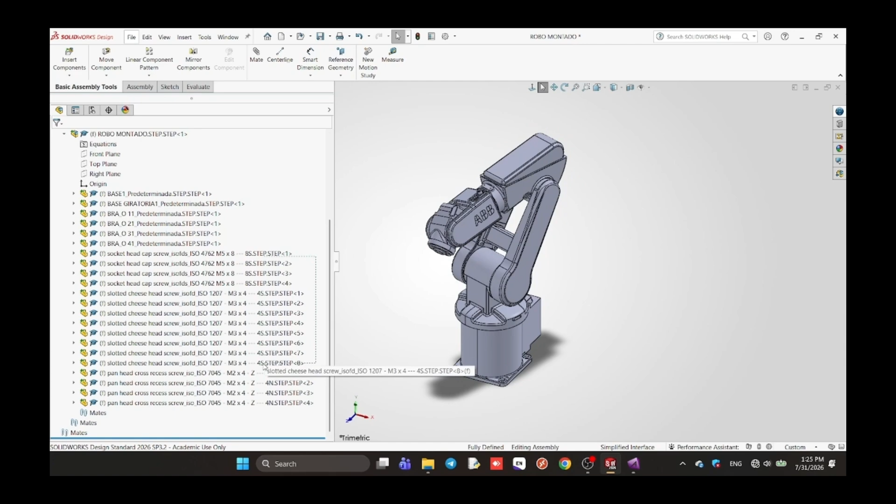When you want to export in Parasolid format, you can easily hide the redundant parts you don't want to transfer, and then export it. These are my 6 main parts. I want to keep them. I select the parts I don't want to transfer and hide them. Then I go for saving the model.

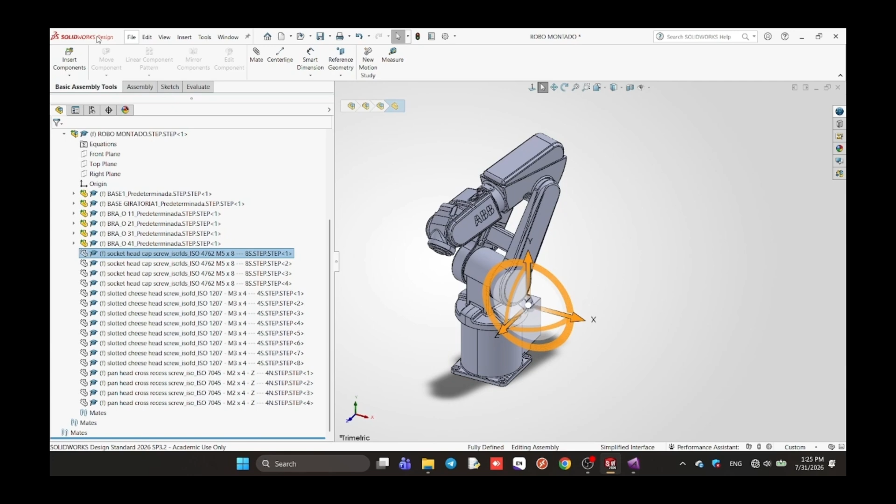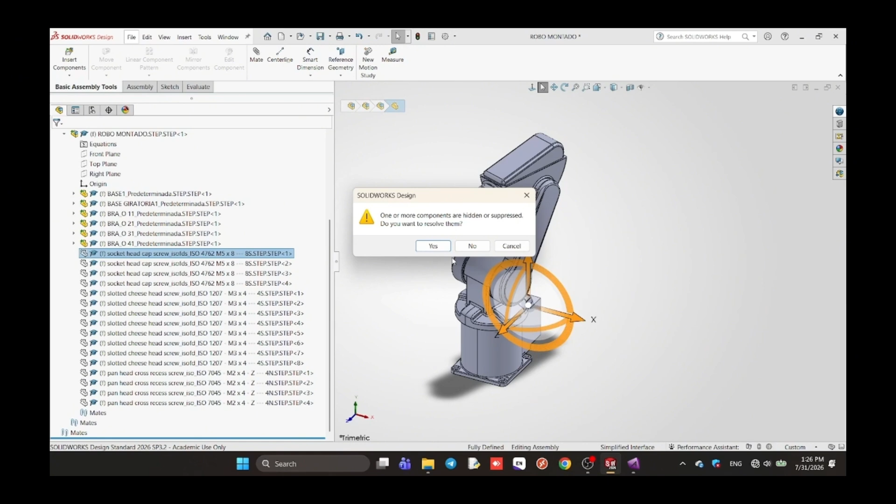You can export in a STEP file too, but Parasolid is more accurate in terms of keeping the geometry of your model. Parasolid is a better format and you find fewer problems inside Adams. Here it asks, do you want to keep hidden or suppressed parts? And we should select no, because we want to keep the model as simple as possible.

Then we go inside Adams and import the model. You shouldn't go for new database when you want to import from SolidWorks. Import should be chosen. And we go to the address of the model. Then we should choose a name. Here I choose ABB. And I don't change the default settings of Adams.

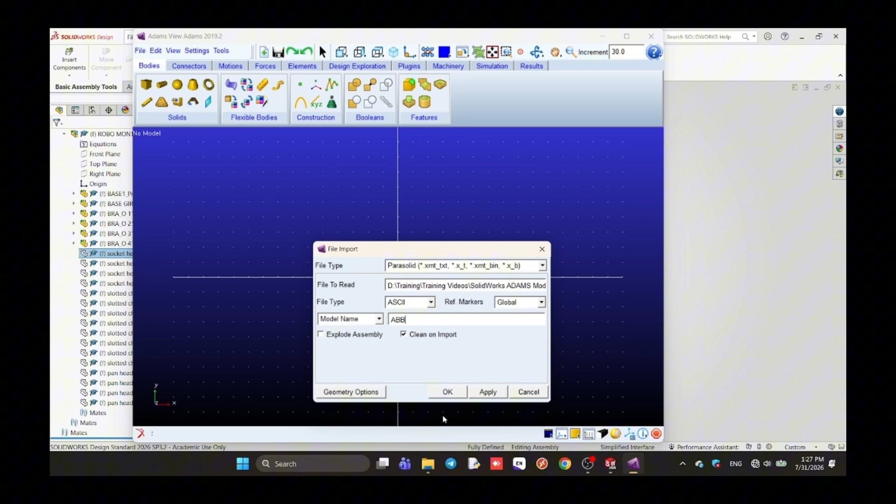If you enable explode assembly, it explodes your robot model and puts the parts in different positions. So creating joints becomes more difficult. So I don't change this. I'm just going for OK. Then we go to view model. Okay, this is a wireframe format of the model without mass, without inertia. We should give mass to the links.

But first I go for defining gravity. By default, Adams regards gravity along the y-axis. I don't change it, but you can change it. If you want to regard gravity along the z-axis, you can change it from this window. We should select OK if we don't want to change it.

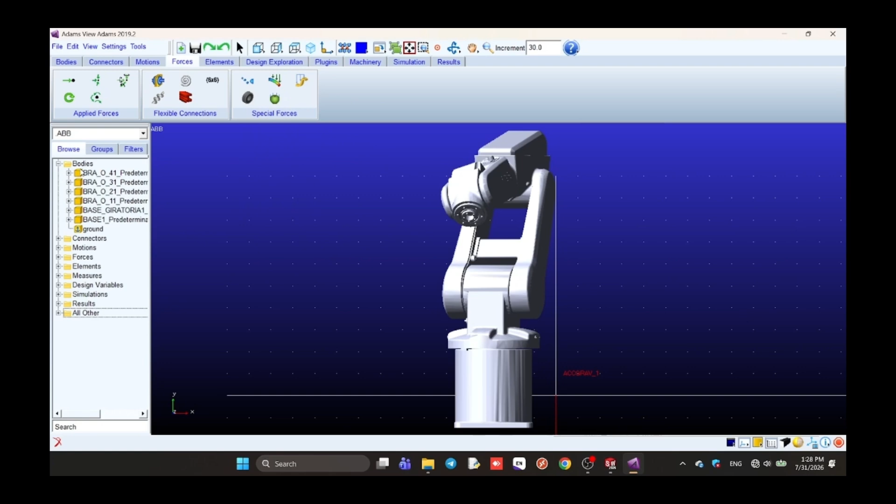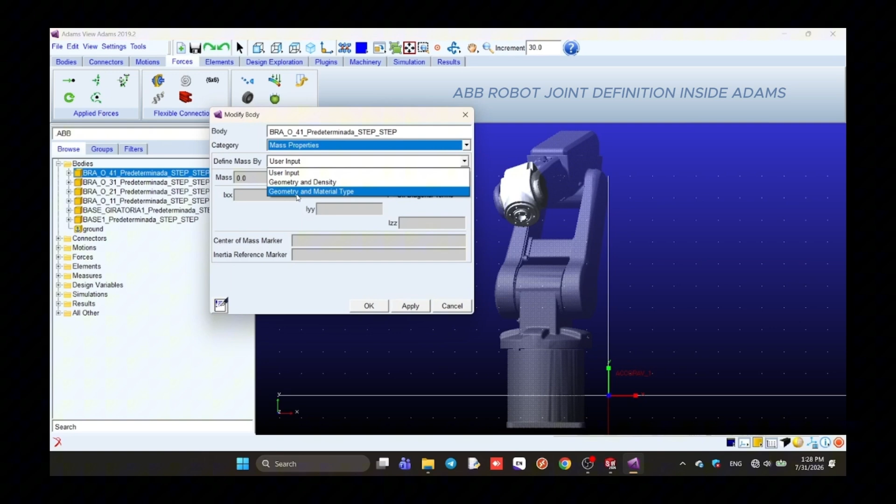Okay, here are the parts with the exact names according to the names of links in SolidWorks. We can change them in SolidWorks or we can rename them inside Adams, because these are very long names and somewhat similar. So we should give mass, modify. You have 3 different methods to define mass, manually or using the library of Adams. I go for choosing material inside the library of Adams and define aluminium for all the parts apart from the base. We do it for all the links.

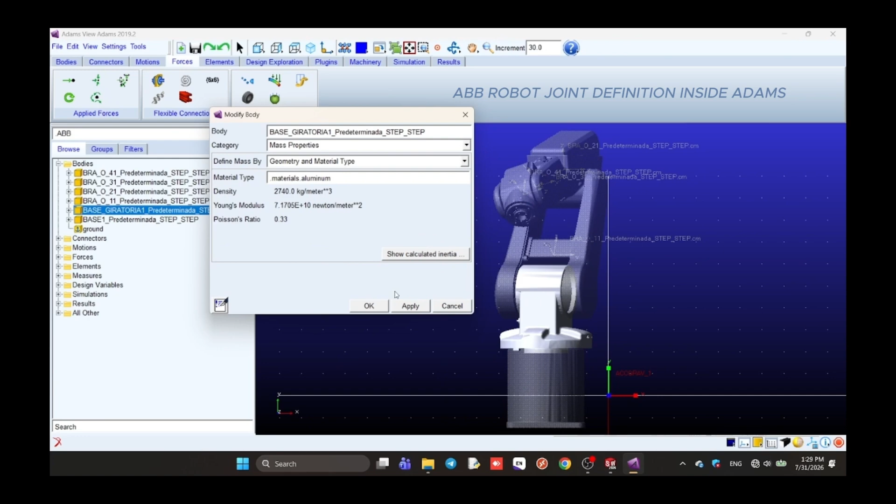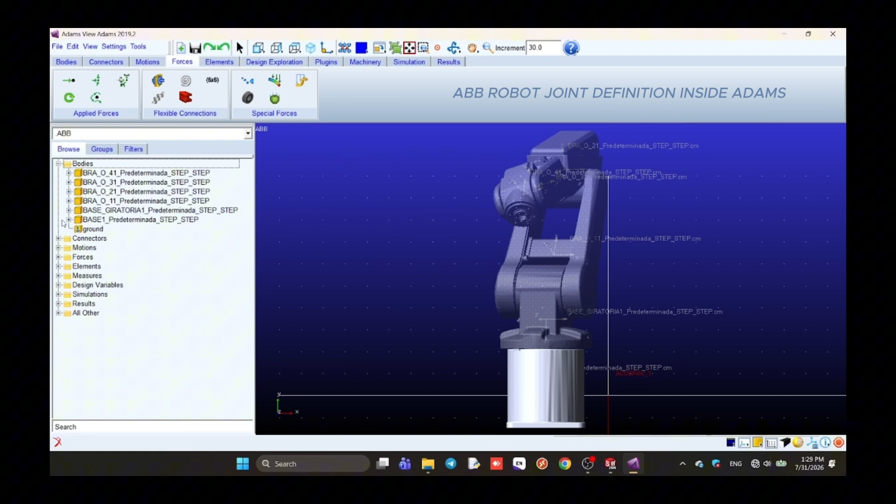But the base part is usually made of steel, so I select steel for it, not aluminum. Okay, and it's better to choose a different color for each link. When creating joints, we shouldn't be confused by the names of links or their colors. But you should change it from your solid part, not from the body part. Going to appearance using the library of Adams. Just choose different colors. It's not important which color. We do it for all the links.

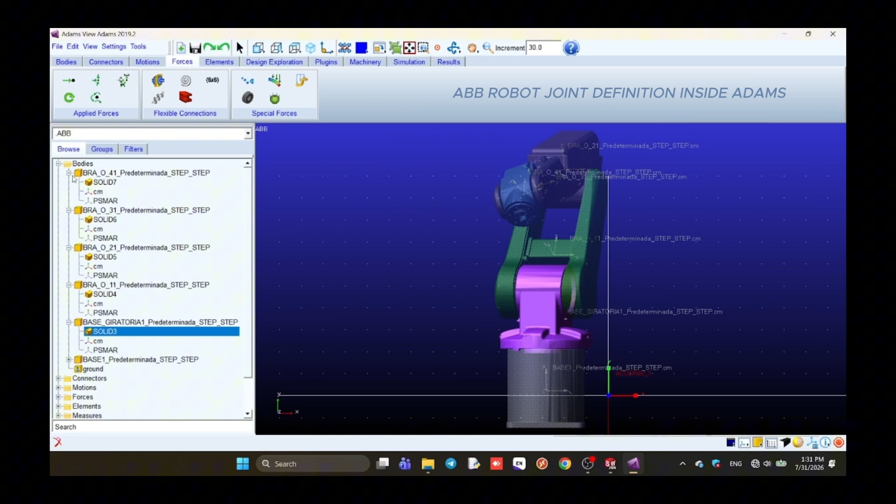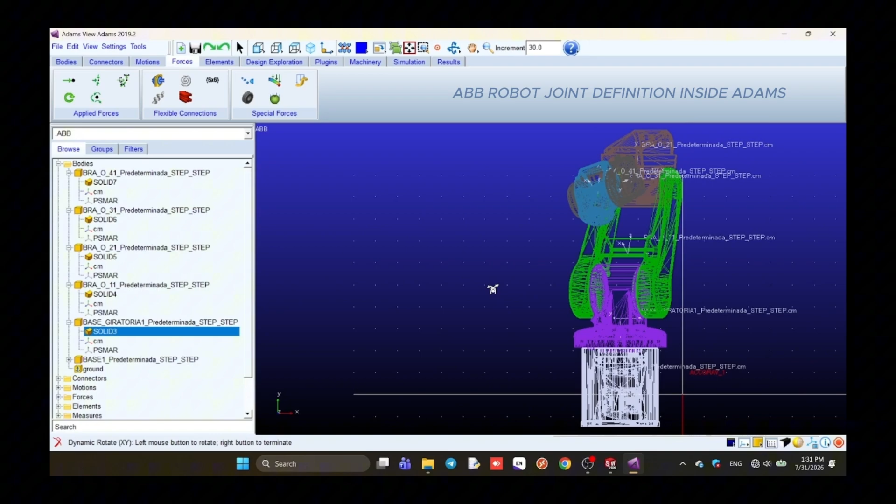Okay. Then we should define markers, because we need markers for creating joints. If you look at this model, it has an orientation compared to our working grid. So we cannot use the main axes of the coordinate system when defining joints. We should have joints according to the orientation of the link.

I want to use a center of mass marker. This marker is created after giving mass to the links. I just copy paste it, using its orientation, but transfer it to a better position. Orientation is very important when defining joints. Just copy the center of mass marker and Adams pastes it automatically.

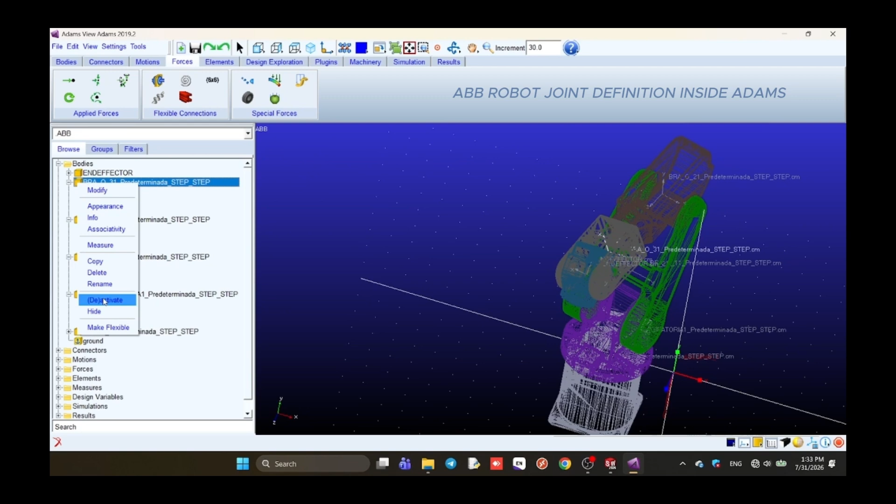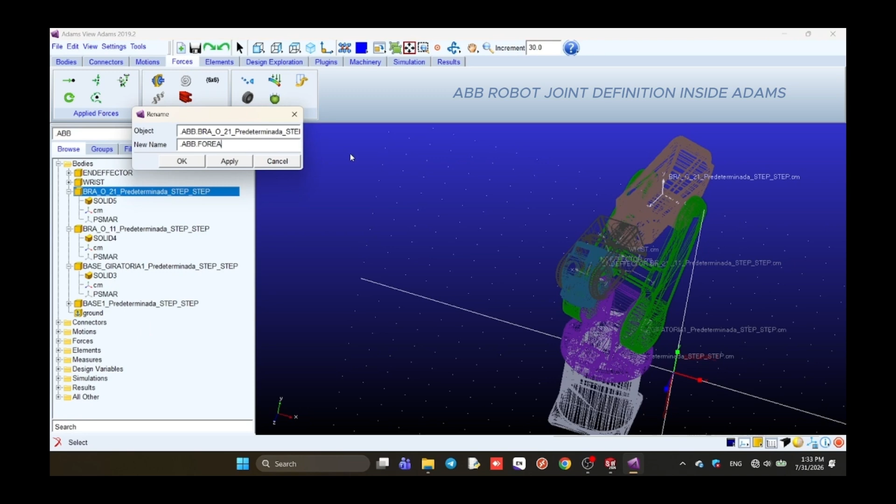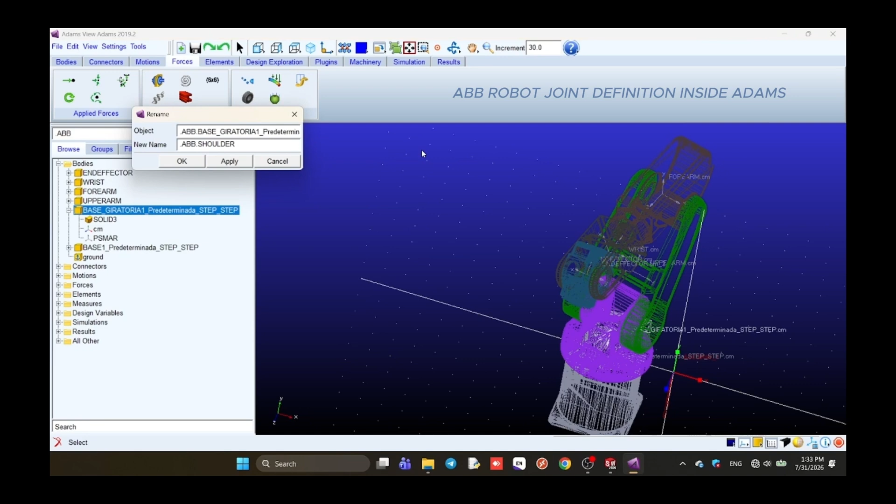Here it's better to first change the names of the links, because they're too long and very similar. We choose simpler names. The last part, which is named base, should be fixed to the ground. Okay, now I rename it to ref.

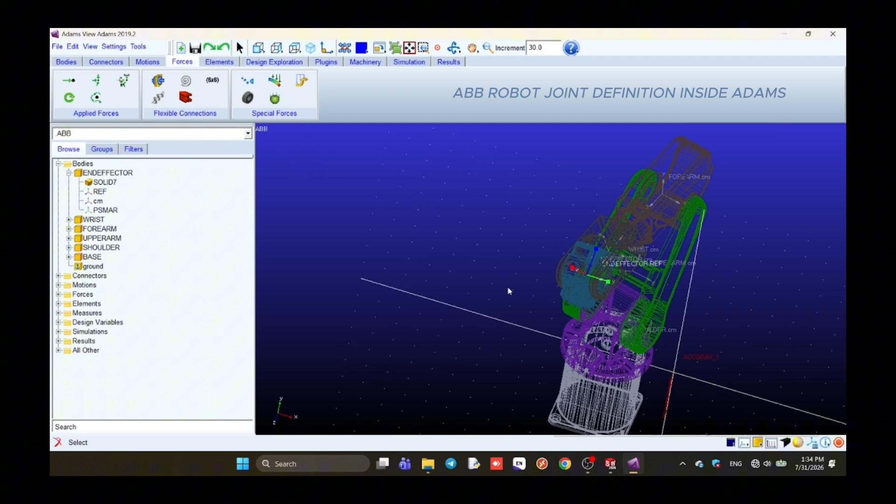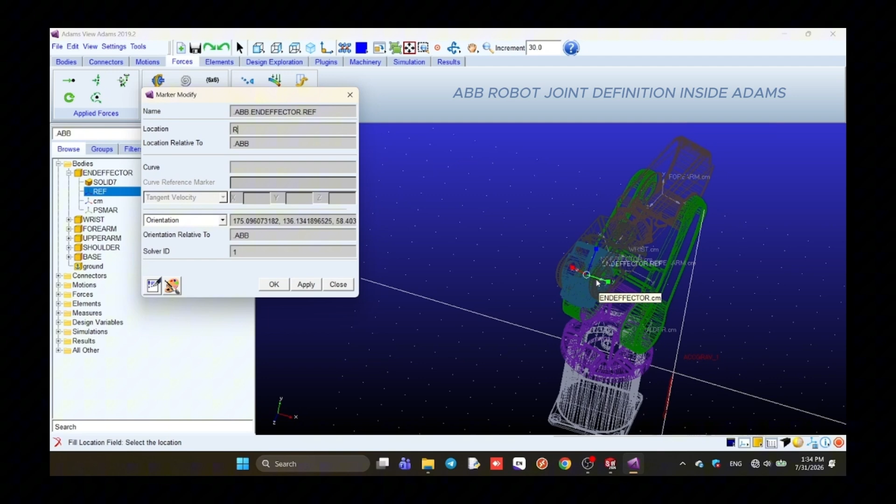And modify, transfer it to a better position. I don't change the orientation. I want to keep the orientation of the center of mass coordinate system. And so I just pick a point close to the interaction surface. I want to create a joint between the end effector and the wrist, the previous link. The wrist is fork shaped, but it's only one link. It doesn't need two revolute joints. Just one revolute joint is enough.

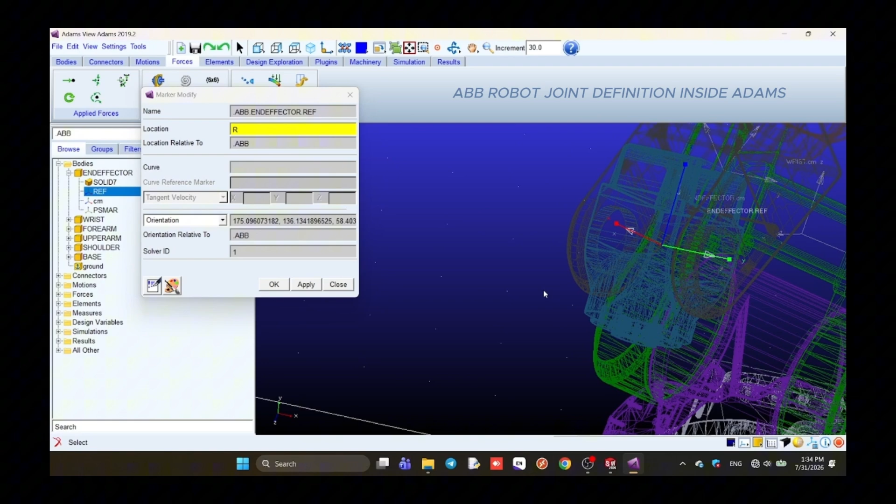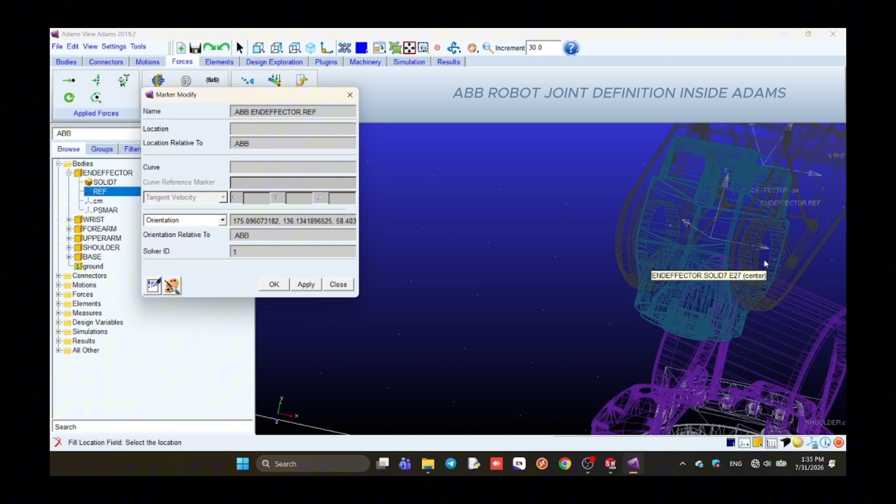I try to choose a point on one of the interaction surfaces. Which point you want to regard is up to you. The left one or the middle one, it's up to you. I hid one link before to better see the interaction surface. Okay, we can rotate it to see where the marker is created.

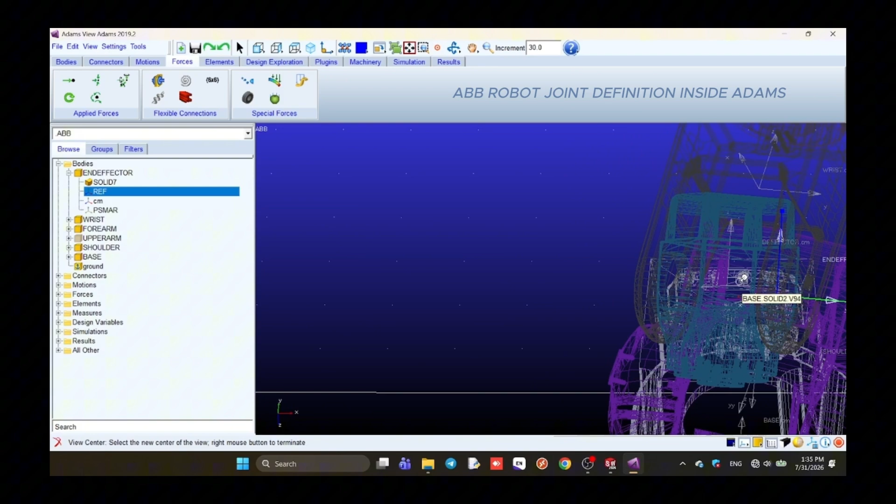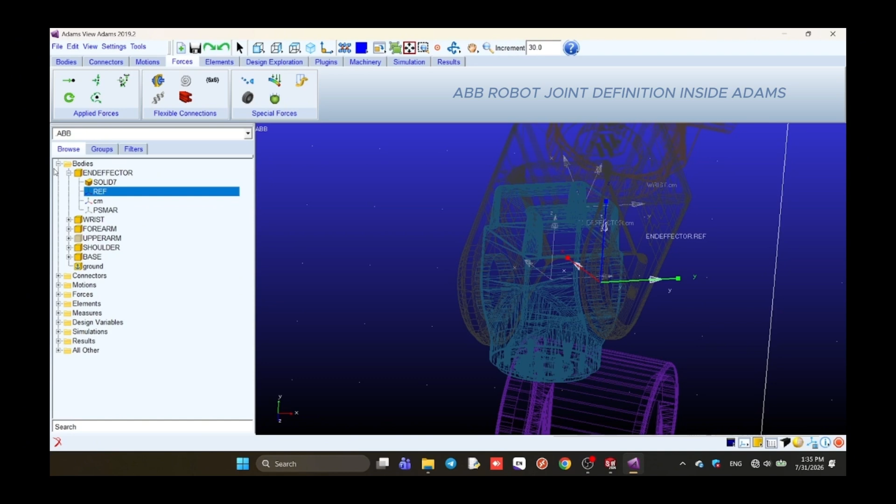So here it seems it's in a good position. We should do it for all the links where we want to create a revolute joint. Then I go for revolute joint, method of two bodies and one location, but normal to grid shouldn't be used here because, as I said, links here have orientation compared to the grid window. So we should go for another method to choose a coordinate system, to choose a marker. So I go for pick geometry feature.

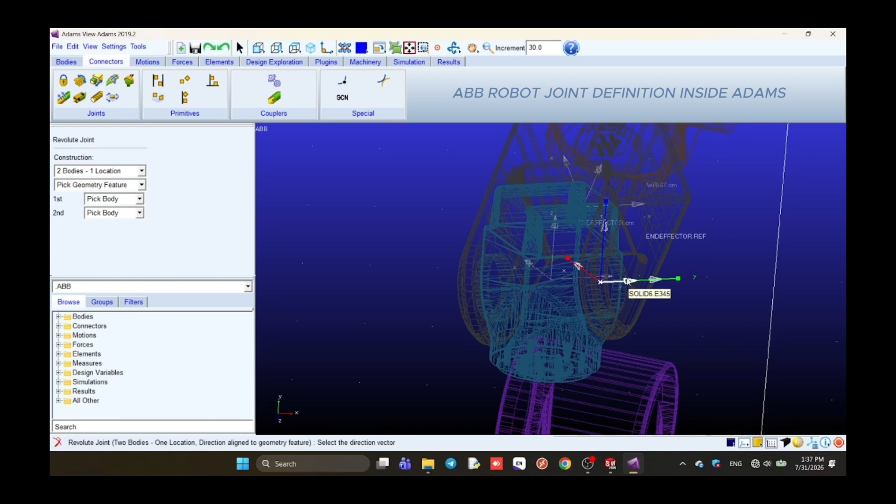The first body usually is the parent link, the body you want to orient relative to, and the second is the child. So for the first I go for selecting wrist, and the second is end effector, the last part we transferred, and then we choose the marker we created named end effector ref, and select the axis around which the joint should revolve. Okay, it seems the axis is correct.

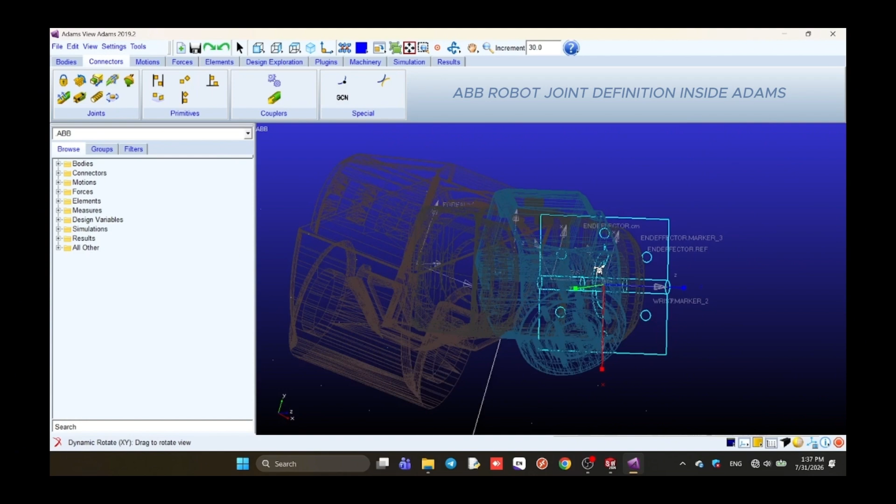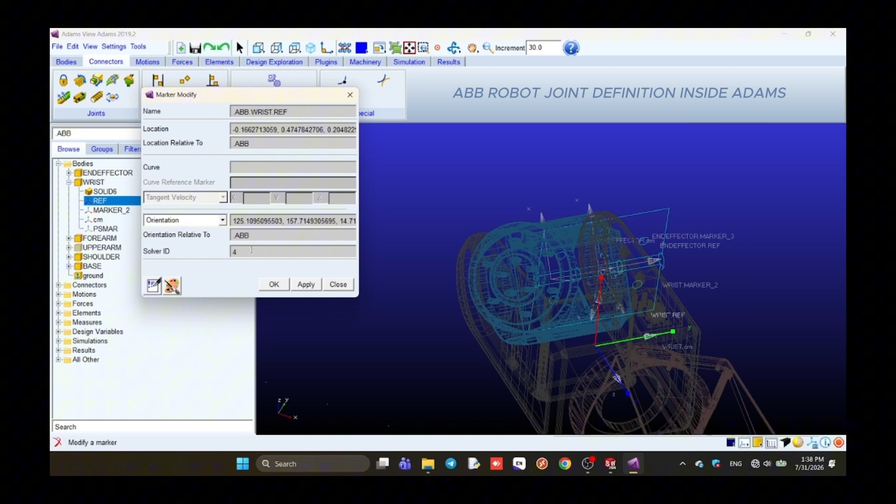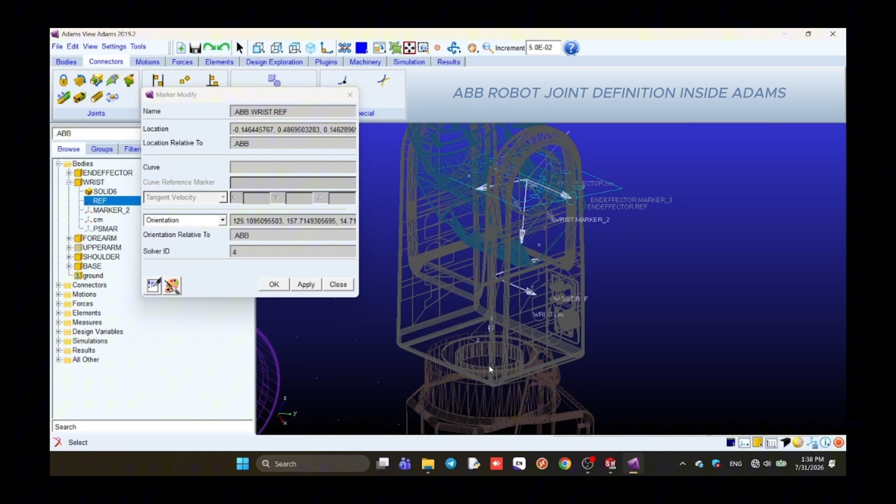And then going for doing it for other links. Creating a marker from the center of mass marker, rename it, and then we should modify it. We should change the location. Okay, I try to choose the location, the better location closer to the interaction surface, but I don't change orientation. Select the center of forearm, and then we should define a revolute joint here.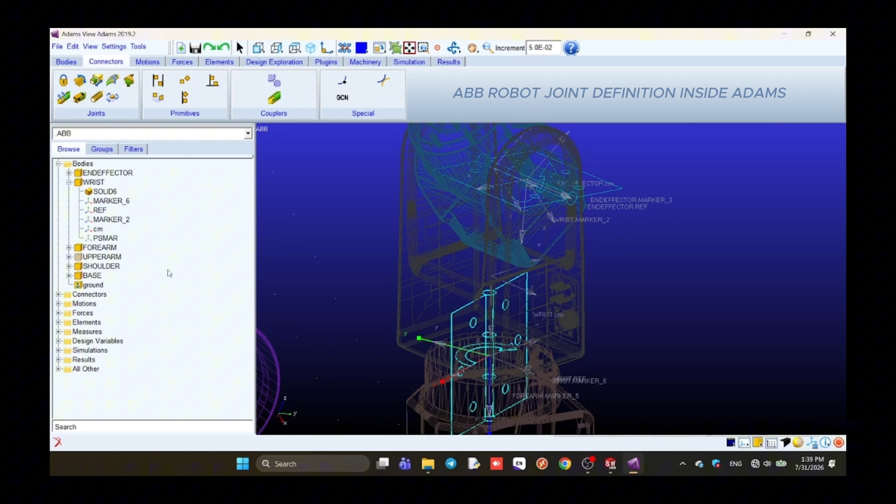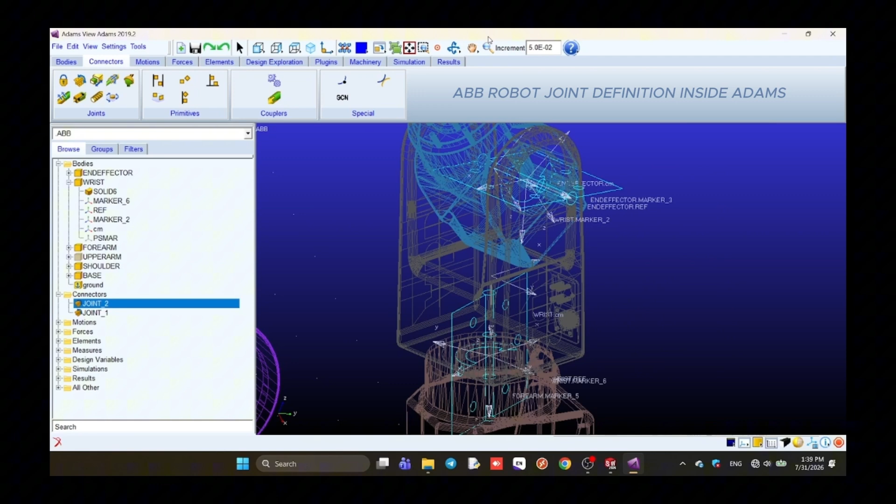We select bodies and then reference, and select the axis we want to create joints around, and then we can check it. If you want to modify it, you can do it from connectors. Your joints are listed inside connectors, and you can modify them by changing the type or other positions, or even rename them there.

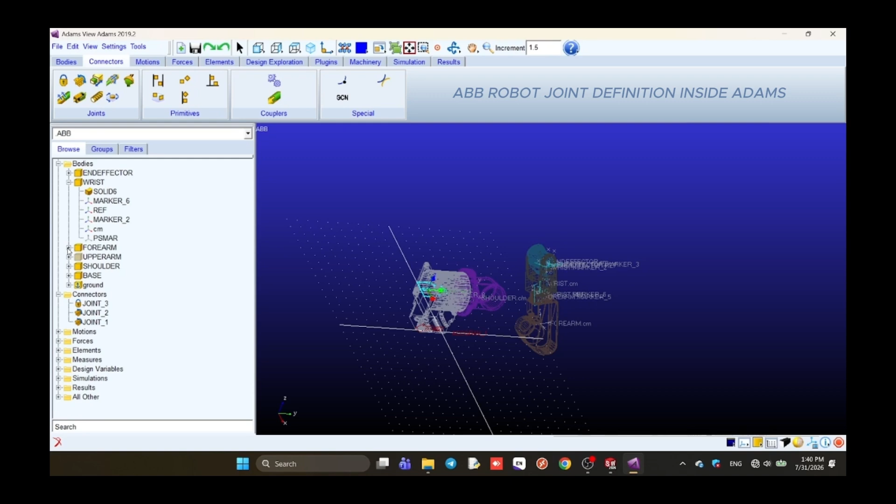Base should be fixed to the ground, and it's not important which location you choose. You can even go for normal to grid for fixing it to ground. It's not very important. But for revolute joints, it's very important which axis you define. Should do it for other links too. I did it. I created joints for all the links. Now we want to check whether they move correctly or not. So I should create motion, and I want to see its performance one by one. So I only keep one revolute joint, and temporarily I fix the others.

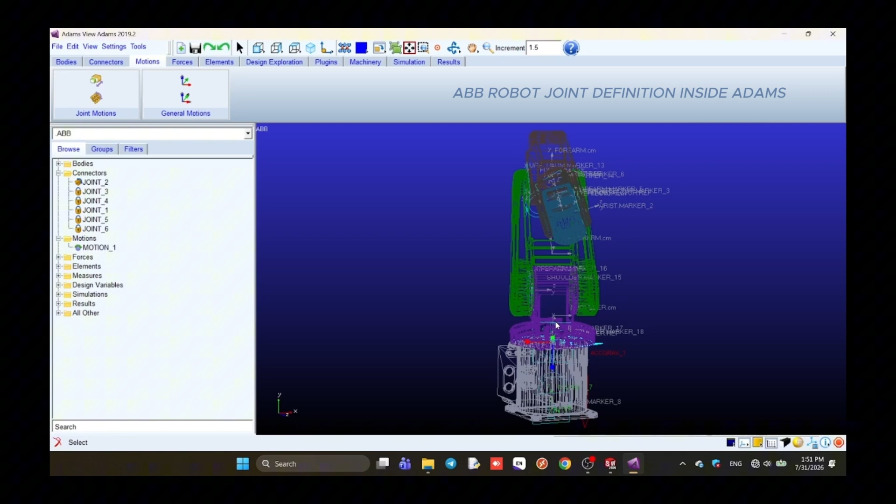Then we go to the Motions tab, second one, and we create a motion. Here Adams asks you which angular velocity you want. By default it's 30 degrees per second, and I change it to 10 degrees per second to see it better. So you can go for simulation. I don't change the default settings, but if your model is complicated, you can change step size and simulation type. I put it on default. Adams can detect which simulation is needed based on the complexity of the model. So we just simulate it.

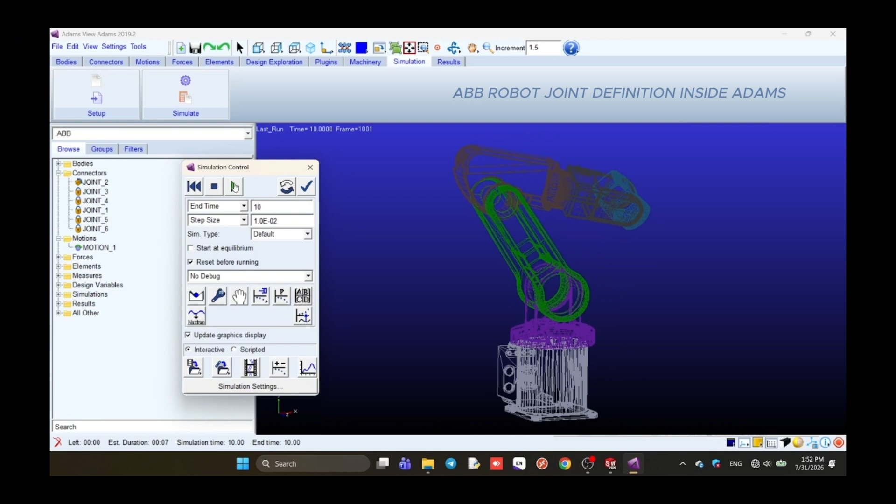So this is joint 2, and you can see it moves correctly. I increase the time to see it better. I double it. It rotates correctly. We should do it for other joints one by one. But first I deactivate the motion. If I don't do it, I can't fix joint 2. So first I deactivate the motion and then fix joint 2, and set joint 3 back to revolute.

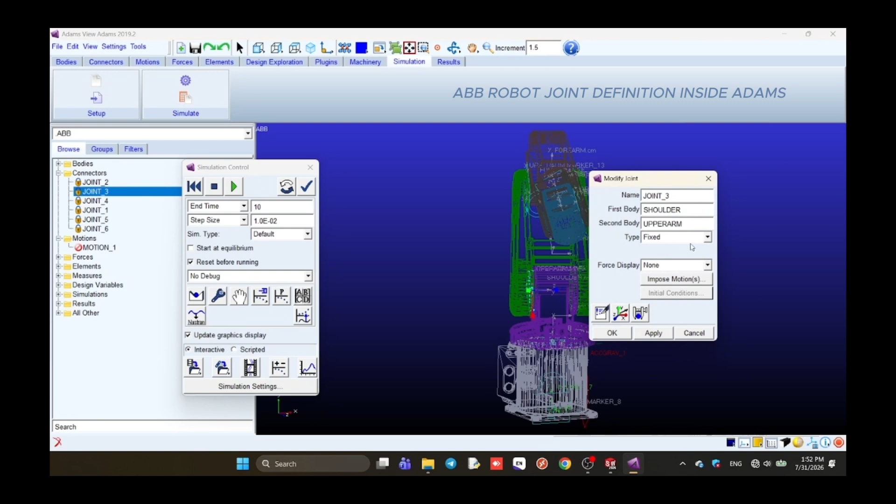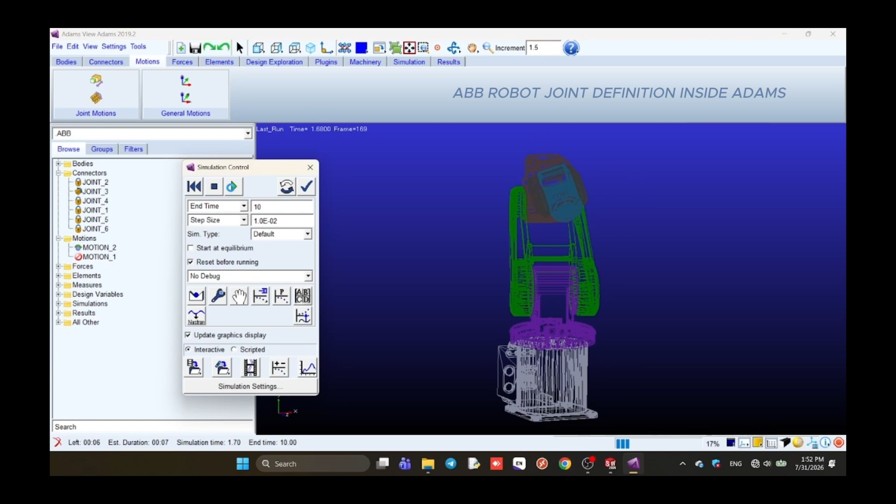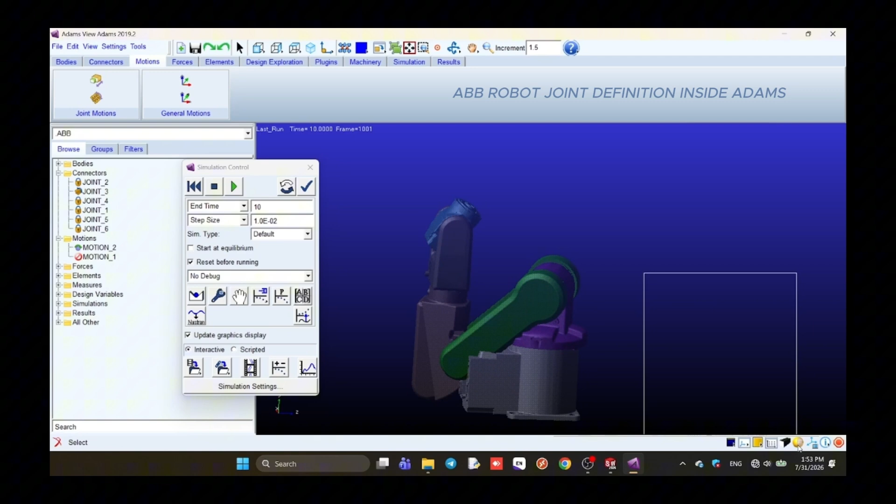Then we define motion for joint 3, and again 10 degrees per second is good. Simulate joint 3 here to check its performance. Okay, it rotates correctly, but there is one problem. We have collision here. Between base part, forearm, and upper arm we have collision, which in reality is not possible. And that's why we should design a controller. Adams doesn't stop automatically because of collision, but we should control the body. I do it for other joints.

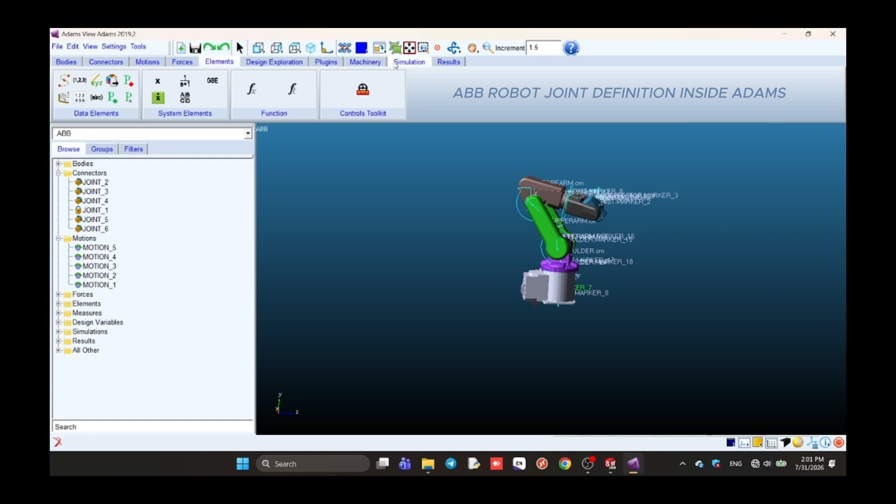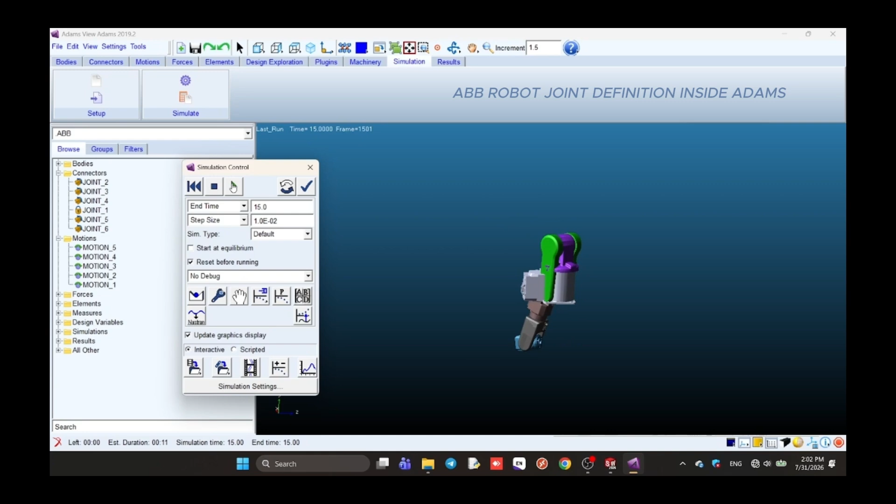Okay, here I checked all of the joints, I defined motions for all of them, and for the last time I want to simulate it again. Okay, we simulate the model. So the model moves correctly, and the only problem is this collision. In the next tutorial, I want to use Control Toolkit inside Adams and apply a simple and feasible controller, a PID controller, to limit the motion of the links.